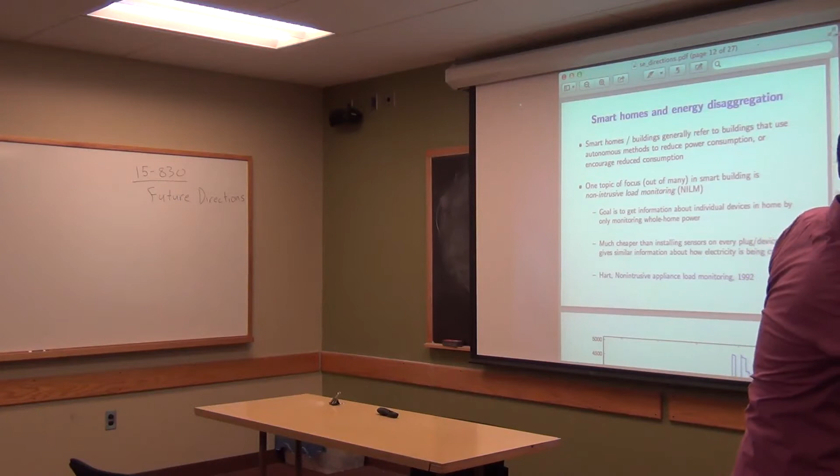Boy, this is just really deciding it wants to show some fun stuff, doesn't it? Okay, go away.

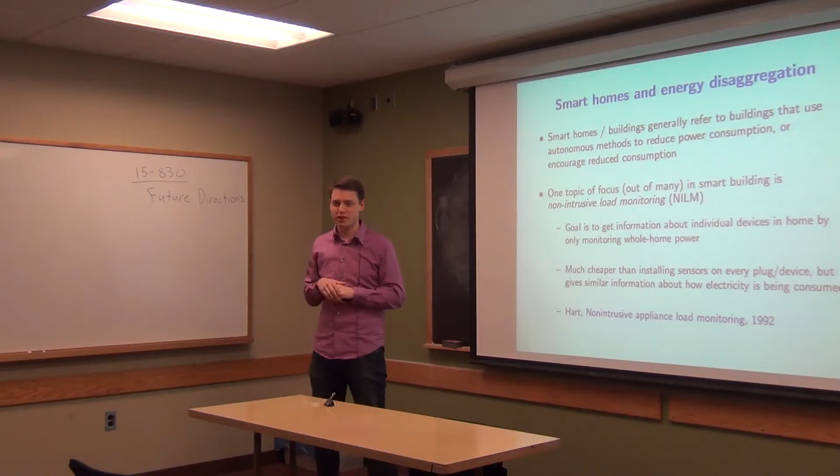Okay, so today we're going to finish up on a couple future directions, and I'm going to be very brief on all of them. Today we're talking a little bit about smart homes, and in particular I'm going to focus on an area I work on a lot, which is energy disaggregation. It's also called non-intrusive load monitoring, and I'll describe what that means in a second, and then give a very high-level overview of some of the work I've done in this area, to give you a sense of what current machine learning research is on these problems.

And I'll talk briefly about some work on demand response, and then even more briefly highlight some issues involved with things like microgrids. That will close out the things we're going to talk about today, and hopefully covers a very limited subset of the current work in sustainable energy, but at the same time shows you that there are a lot of areas where computation can play a big role here.

So to start off with, smart homes. I think the idea of a smart home has been around for a long time, right? The idea of a home that would be more intelligent, both in terms of being better for the users inside, and also for using less energy, is typically a common motivation for smart homes. So they do things like turn off lights when people are not in the rooms, predict when people are going to be home, and preheat the building, this kind of stuff.

There's a whole body of literature on these topics, but I want to focus on a particular element which broadly goes under the category of smart homes, which is non-intrusive load monitoring. And this isn't really about a smart home in the sense that we're not really taking any actions in these homes. We're really just reporting information to the user, the homeowner, or whoever's living in the home, in a more intelligent way. And here's the basic idea. Let's see, okay, I didn't just describe it from this slide too.

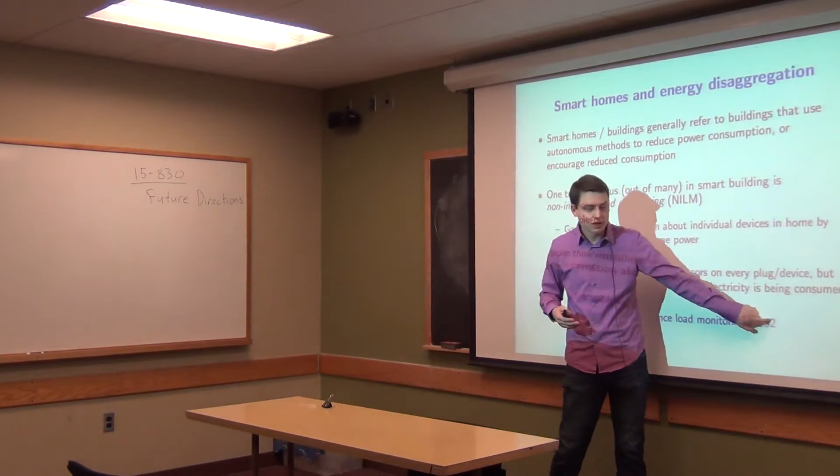Yeah? Are those device PMUs? No, this is a home, so we're not talking about PMUs. This is in a home. I'll show you an example in a second. So this is like in your home. I don't have any PMUs in my home. PMUs are used to measure phase angles on the distribution, or on the transmission network. So they're unusual to have as a personal device.

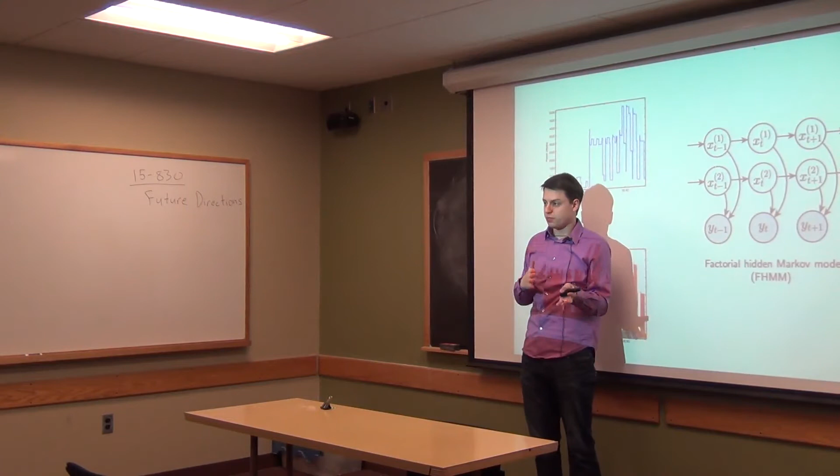Though we didn't cover it, this is a figure known as a graphical model representation. If you take more machine learning courses, you'll run into graphical models a lot. This is just a graphical way of representing the dependencies between these different elements. All this is saying is that the state at time t is probably going to be influenced by the state at time t minus 1, and it will influence the next state as well, right? Because states tend to stay on for a period of time and turn off for a period of time.

What these arrows here mean is that what we observe, which are the gray nodes here, is going to be the sum of these different unknown values. And from these things, we want to find the values of the different nodes. So again, don't worry about the details here. The overall idea is that this is a little bit richer representation than what you had in the previous thing, because it also captures dependencies between different time steps.

Now, this is the only slide I have on this, so I'm not going to cover it in any detail, but a big challenge with these kinds of models is the task I was talking about before, which is called the inference task. The inference task is, from these observations, determine the different power levels of the different devices. As I said before, this is a very hard problem, right? All you can really do, and this holds the same for these probabilistic models, is check every possible combination of appliances and go through that exponentially growing set of possible combinations. And it's not very efficient.

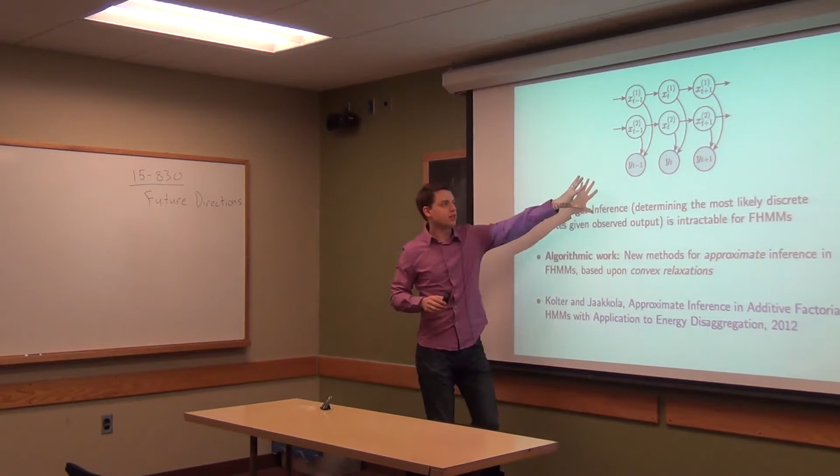And in fact, for a real home, there's far more appliances than you could really do with a model like this. That one I showed you before was pretty simple. There's only a couple, but there's actually a lot more in that house that could be on. So my work in this area was essentially using new methods for solving this inference problem. How do we compute what these values are given these outputs here? And the way we do that, as with everything else in this class, is through optimization.

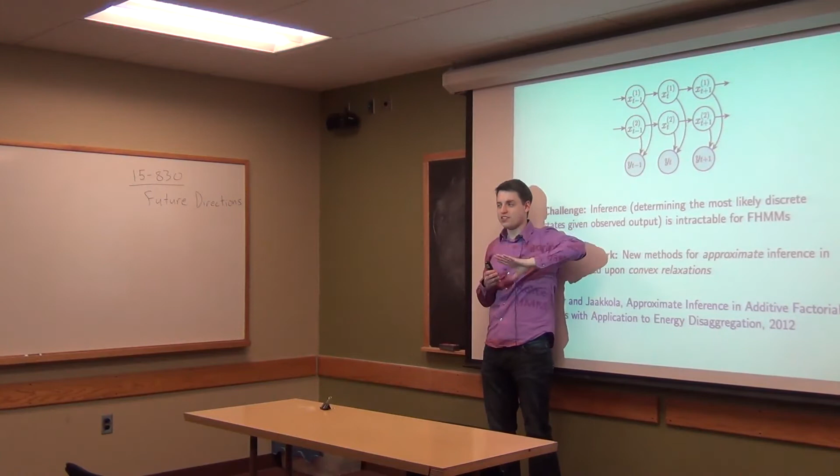It turns out that for this hard counting problem, you can actually perform what's called a relaxation. If you form it as an optimization problem, it will be non-convex, right? Because there are these constraints where things have to be in one state or the other. What you can do instead is relax these problems such that you can be in some combination of states. Now, typically that's a bad thing, because you don't want to say that some power source is half of a refrigerator and half of a dryer. That wouldn't be very likely.

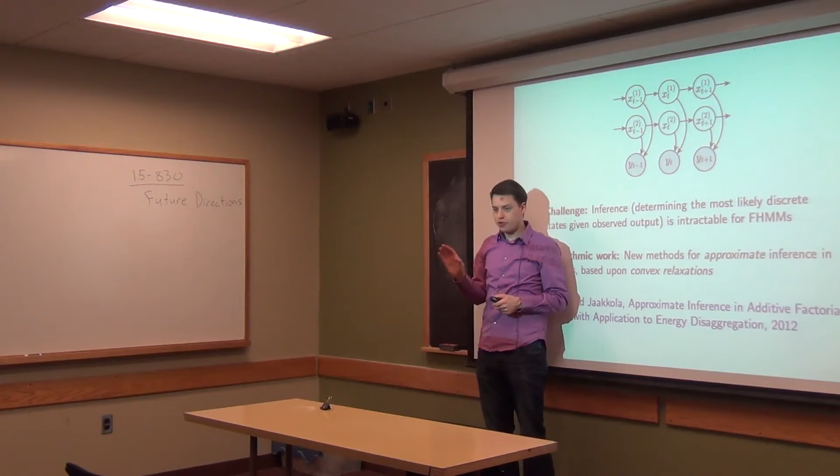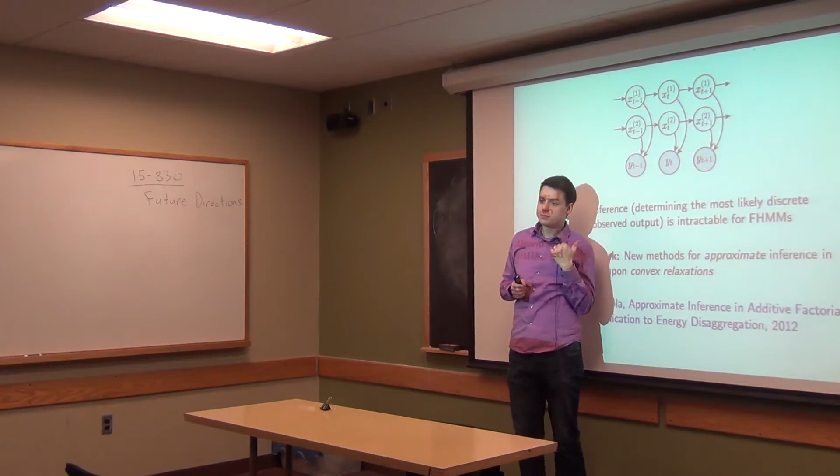But if you play some clever tricks, you can transform this to a case where you relax the problem, and then add some additional constraints that, even though they are convex, discourage situations like that. So, very hand-wavy here, but the idea is by playing some tricks in the optimization problem, you can come up with ways of solving this problem, which definitely aren't guaranteed to work, because in the general case this is actually an NP-hard problem. But they often work very well for cases that we actually see in practice.

Yeah? What do you mean by relax the problem? Yeah, so that's actually a technical term. We didn't really talk too much about integer programming in this class, or binary programming. But essentially, you could have some optimization problem where you want to minimize over x of some function of x, right? Subject to a constraint that maybe x is, say, a vector in Rn.

Subject to, and I guess this is sort of bad to write here because I'm going to constrain it much more now, but also the fact that each xi is actually going to be in 0 or 1. Okay? And this is what's known as a binary integer programming problem, because you're constraining your x's here to be binary valued. Now, this is a hard problem to solve in general. There are some sort of nice solutions, and actually Cplex has some very fast, approximate ways of solving things like this.

But in general, because these constraints here are non-convex, you can't write this in the form of any convex function. Because of that, all you can do is basically try out every single possible combination, right? In which of course there's going to be two to the n different combinations of possible values.

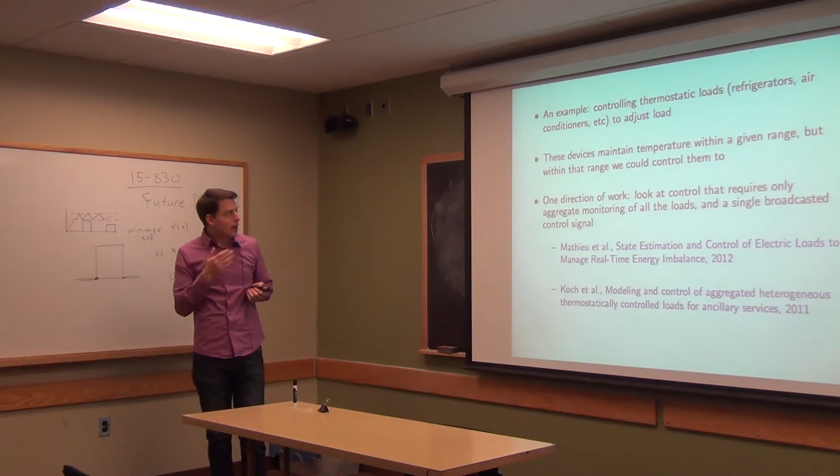In fact, they do that already. If they didn't do that, they'd have to turn on and off constantly to keep that exact temperature. So they have a little bit of a gap where they say, okay, it's okay to be within this gap here. Right? And the idea is, as long as you're maintaining things in this gap, you can really do whatever you want with these loads, right?

You could turn them on here, like this, which is kind of the standard way of doing it. I guess this is a heater, so you wait till it gets cool, you turn it on, and wait till it gets to the hottest point, then turn it off, and you just go like that. But you don't have to do that, right? You could control them differently. Turn it off maybe when it gets here, right?

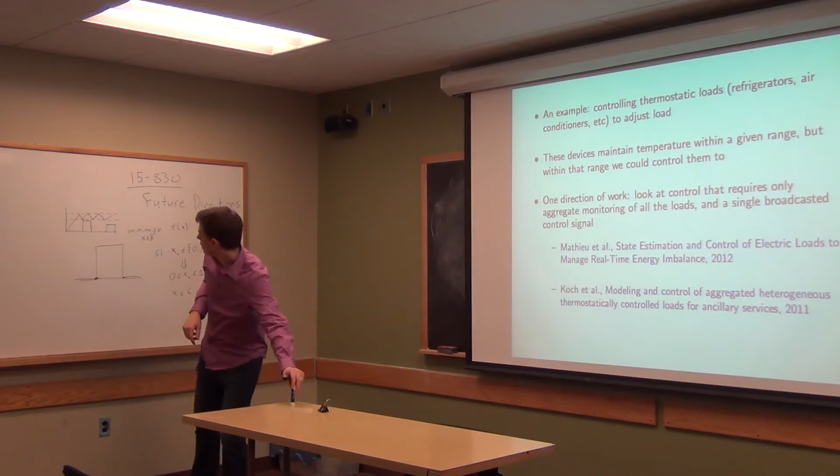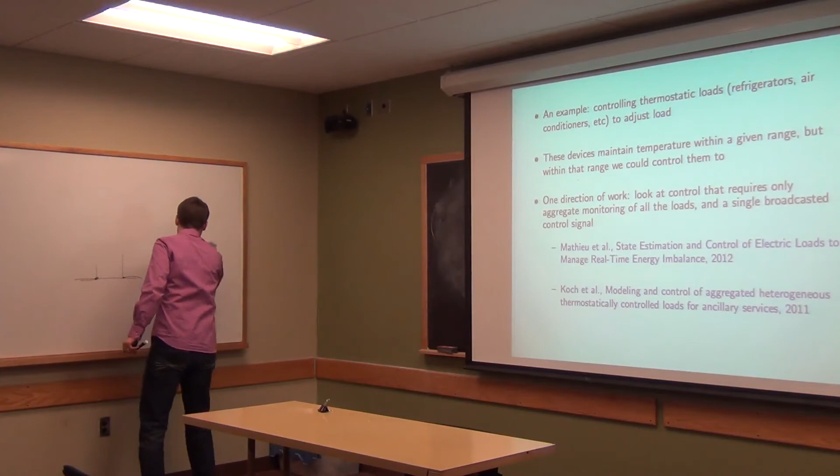Can everyone see? This is sort of a very small drawing I'm making. Maybe I'll make a little bit bigger one. All right, so you have some upper bound, and you have some lower bound on temperature.

And commonly, a heater, for example, will turn on until it's as hot as you want, or at the upper limit, and an air conditioner will do it in reverse. Then it'll turn off, and at a different rate, it'll come back down. And you'll turn it back on, and just go back and forth like this. So it's on in this range here, off here, and then on here.

But there's no requirement to turn it off and on like this, right? We could have turned it off here. That's fine. We're still within that bandwidth. And the idea is, can we intelligently control these devices? If we have one, we could do maybe a little bit. But if we have a lot of them, maybe we can coordinate these somehow to, as a total, turn on and off at the right times to track small changes in load, say, of wind power. So can we adjust these things in a way that achieves desired behavior for their total consumption?

Now, we can't actually completely eliminate their consumption, of course. All we can do is shift it in time a little bit. We can say, okay, we're going to consume here instead of here. But when wind is blowing, and you have the variability in wind, the ability to change your demand even over small time periods is very, very valuable. And so that's what these kind of papers look at, and they look at doing it in a particular way.

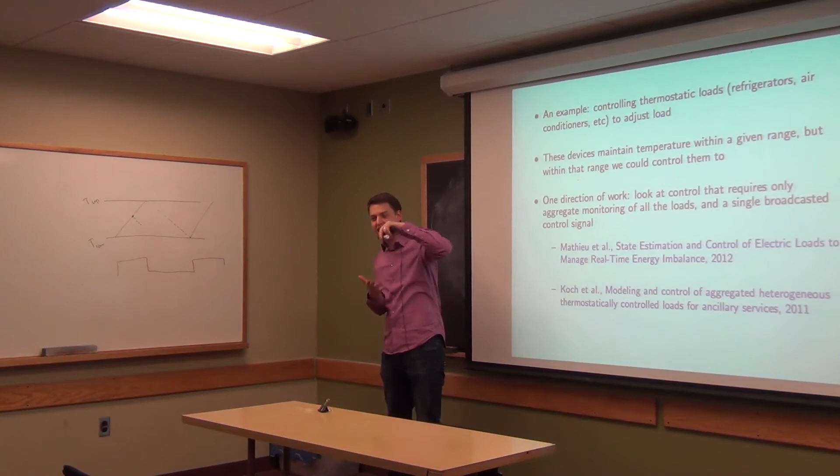They look at the situation where you only have one control action you can send to all your refrigerators. You can't control each one individually, because that could be a lot of computation, right? If you needed a state space with, say, 10,000 different states of the refrigerators, that would be hard to solve, even with something like MPC.

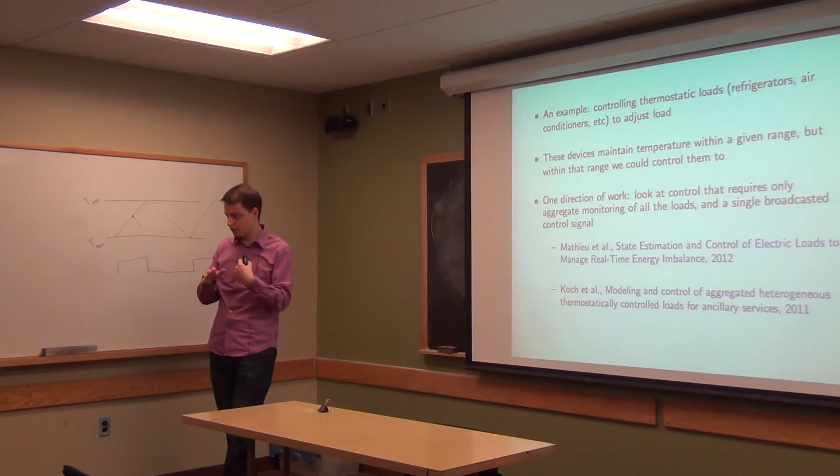So instead they say, I'm going to send out a single control signal to all the refrigerators. And that control signal will say what action you should take, basically turn on or turn off, given that you're in different ranges of temperature. They broadcast that to all the refrigerators, and they only measure the total consumption of all of them together and see how well they can track desired patterns in energy over this whole aggregate of refrigerators.

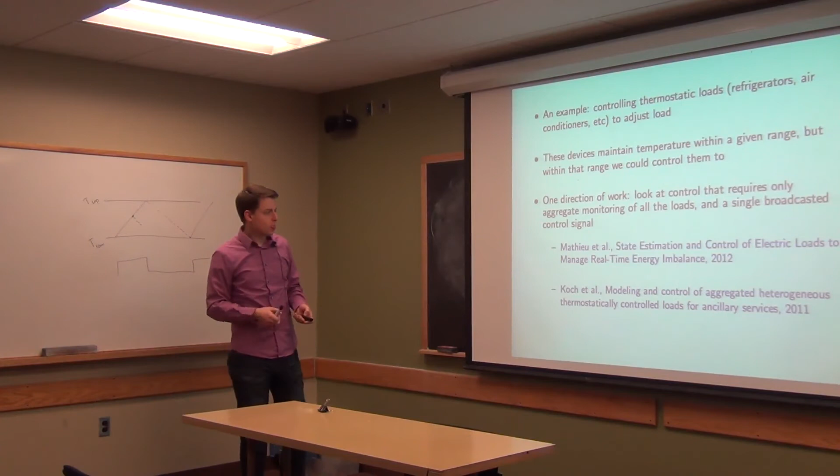So the state of their system is something that looks like this. And again, this is just a figure from the paper. Don't worry about it. It's a little bit confusing. You can look at the paper. Actually, the paper should be quite readable, given all that we've learned in the class so far.

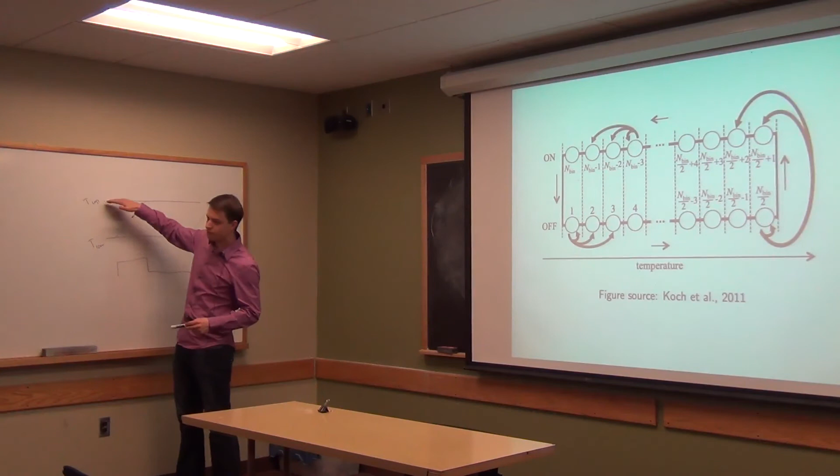They use a Kalman filter here, which we didn't really cover, but you sort of know a little bit about what that is, so this paper should hopefully be pretty readable. But the idea is you take this temperature bandwidth here, and you chop it up into n different bins. Okay, so each of these bins here represents one little range of temperature.

So the x-axis represents different temperatures for each appliance. And then this thing here represents whether they are on or off. So typically what happens is that it turns on and you increase temperature. Actually, is this right? I guess this might be showing an air conditioner, right? So it's showing the arrows this way.

So you turn it on, no, it's showing a heater. Take it back, air conditioner. If you turn it off, that will let temperature increase. Then at a certain point, temperature's gotten high enough, so you turn it on, and then it cools it back down. I guess this is a refrigerator or an air conditioner or something like that.

And typically, you just follow this sort of pattern on the outside here, right? You go through the states like this. You let it heat up for a while. You turn the air conditioner on, and then you let it cool back down. You turn it off, and it heats back up, and like that, right? But of course, you could also tell it, if we're in this state, go there instead. Turn off if you're here instead.

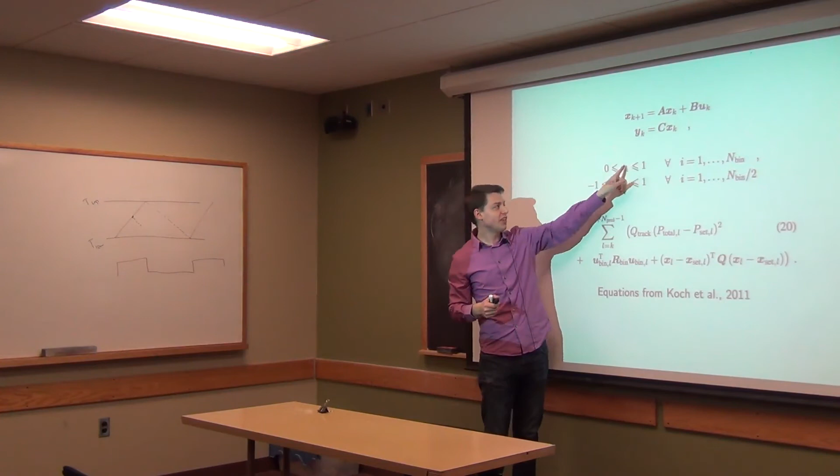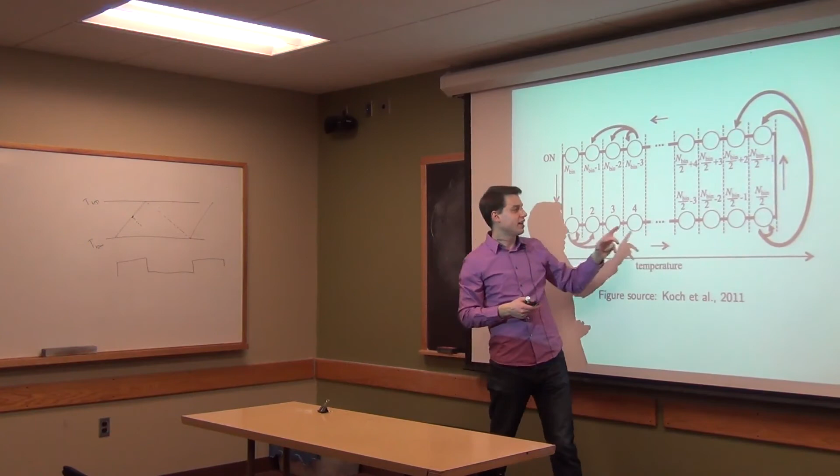Finally, you also have constraints. So what the state corresponds to is actually the fraction of devices that are in each different state of this kind here. That's the state. So the x vector is, I guess, just an n bin dimensional state vector by the notation here.

You can read the paper for details, but essentially these matrices, by putting it in a certain form and making u be essentially the number of devices you switch from one bin being off to one bin being on, which are the actions that you have, you can make this a linear dynamical system. You have linear constraints here. You have a quadratic cost function. And so you solve it with, in their case, MPC.

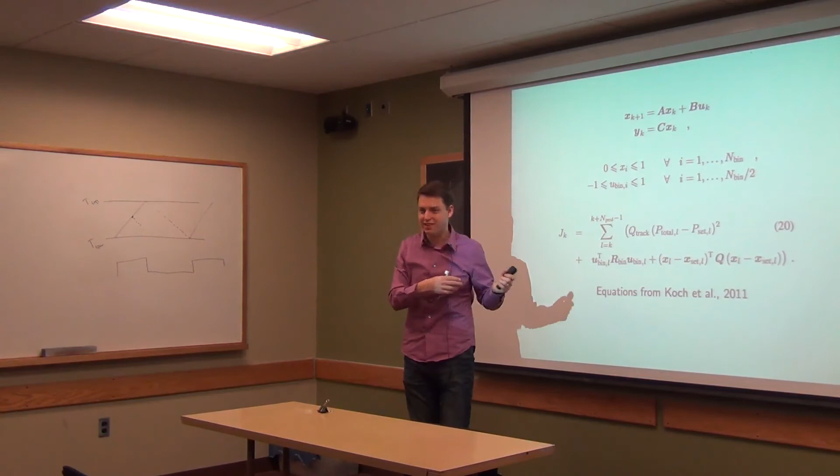Okay, so these are things that are actively being done in a lot of papers out there. This is, in fact, almost exactly what you guys did in the last homework, or maybe are still doing. And this is the kind of results they get. So this loads. I know these ones were big images. Wait for it. OK. So what happens here is that this graph here shows the temperature state.

So this is some air conditioner here. This shows the temperature state of all the different devices. They have 1,000 total, and they're showing 200 here. So what you see is together they all can be in different states, right? As you would expect, there's some randomness involved. One might be the top state, one might be the bottom state. But they're all staying within this desired region here.

And by controlling them intelligently, you can actually follow, and you can't even really see this, but essentially the thing they're trying to track in aggregate power is a pretty big change in total consumption here. It's going from 3 megawatts to maybe 12 megawatts of power over all of them. And you're tracking kind of very detailed curves in power.

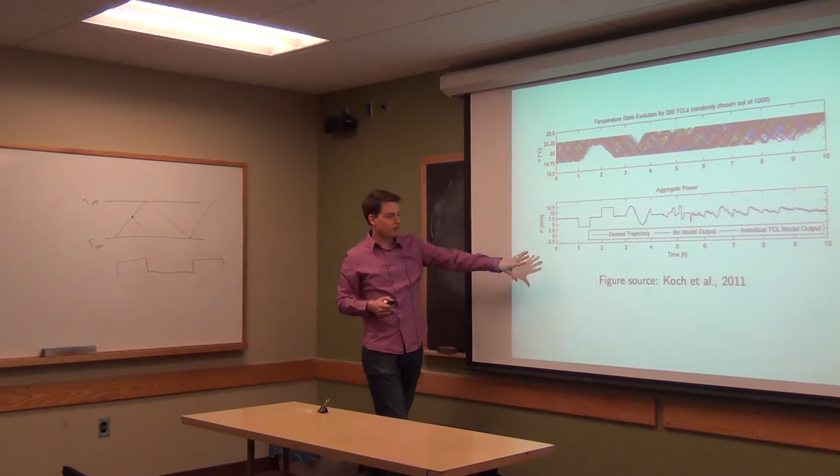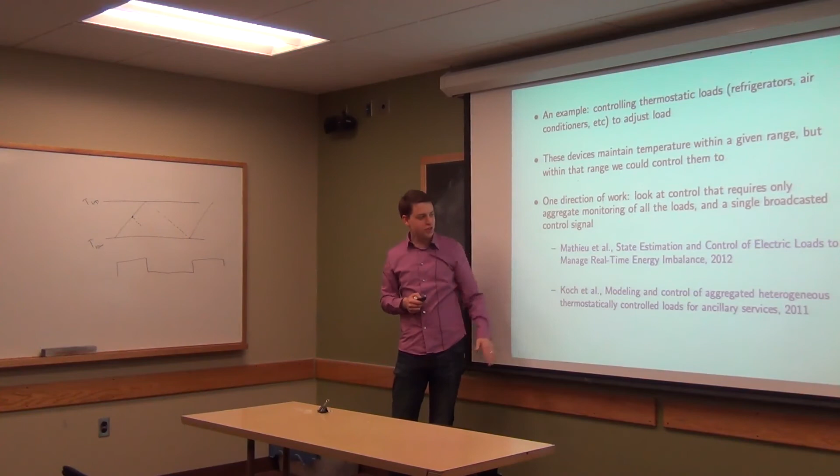And again, if you want more details, this is from the Koch et al. paper, but it's the same group doing both these papers here. I don't know which one's the pronunciation there, but these are both links here, so you can check them out if you want to see more.

Okay, so finally the last thing I want to talk about, I only have, I think, 2 slides on this, is microgrids. We've been talking in a lot of this class about either the home level, with device identification or disaggregating different consumption in a home, or about grid level stuff, where we're talking about the entire power grid of big generators and big consumers. And microgrids kind of lie in the middle between these two things.

The idea is that we're going to have something like a real grid. So we're going to have some generation, maybe some storage. We're going to have loads there.

But we're going to do it at a much smaller scale. And the advantages here are, there can be a lot. You can have much more efficient consumption because you're not maybe transmitting your power over long distances. You have a solar panel right there by your home. You can use that energy very efficiently after it's been generated, I should add.

It also can be more reliable, right? Because even if there is a big outage to the actual grid, presumably if the grid does not go out, you're still typically hooked up to the grid in a microgrid. So you can always use the grid if you want to. But in the case of some outage, you still have all kind of the local supply that you need, right? You have generation locally, you have storage locally, you have all these things that can actually sort of help you. So they can actually be more reliable.

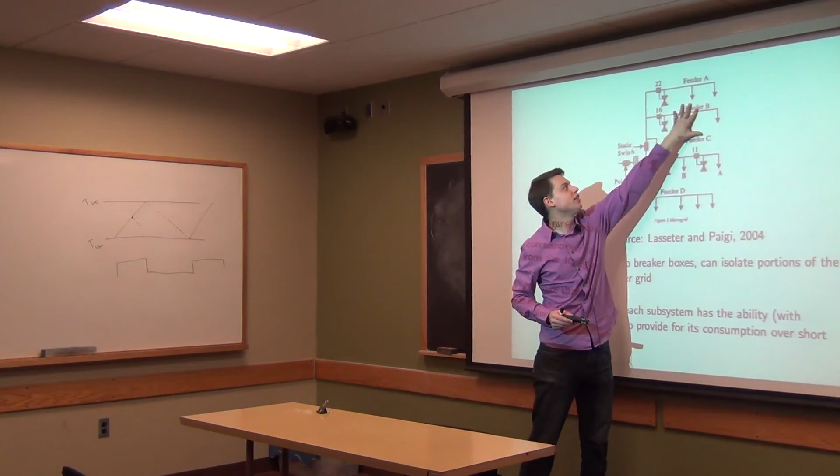And again, I'm not covering this in any detail here. I'm just sort of getting the broad idea here is that you create all the elements of a typical grid, you just do it at a much smaller scale. And you do it in a way such that these ideally can be self-sufficient if they want to be, or maybe self-sufficient for a certain period of time, while you can also just, in the worst case, draw from the grid as you would normally.

And again, what people mean by microgrid sometimes changes. So you might hear that term apply to a lot of things, but this is sort of the typical context of it. And I think a lot of the ideas that we covered in this class, right, of planning and storage and control, all these kind of things, they will come up the exact same way in microgrids.

And they'll do it at a much smaller scale, so you actually need more computation locally in order to coordinate the resources behind this area if you do lose connection to the actual grid, or if you do disconnect intentionally from the actual grid. You need that kind of local control, that local planning. You need to understand the power. I guess power flow, depending on the size of it, might be an issue or it might not be, but it could be an issue even for small systems. So you need to understand all those things in order to run this microgrid. And you have to do all these things we've been talking about at that small scale. Would it be easier because it's at a small scale?

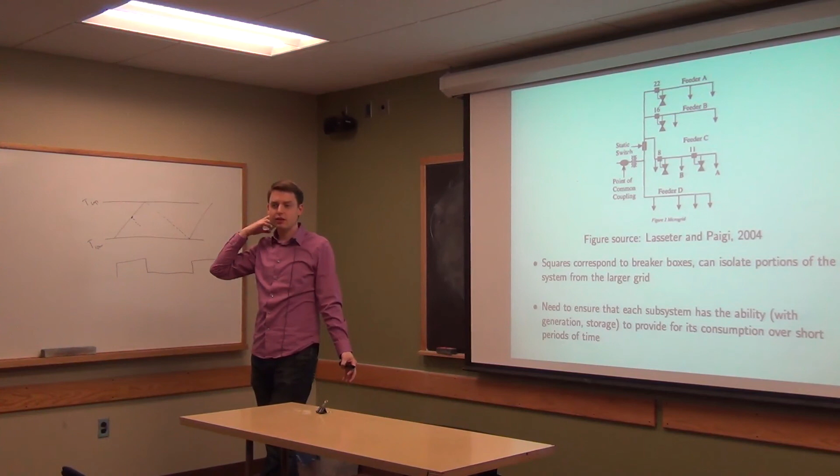It certainly, yeah, probably would be easier. I mean, the ideas are it can probably be a little bit less intensive than the massive optimal power flow you run for the grid. It can probably do things like demand response also, because it's sort of the ultimate demand response, right? You could just isolate it entirely from the grid and give that service to the grid.

You can do things like store power locally and then just use it when you need it. You could store power from the grid while everything's going well, and then only go off if the grid goes down or something like that. So all these things need to be dealt with, but because they're smaller, they can be dealt with better. But at the same time, if everyone was doing this, you'd have a lot of different control going on, and in total, that would actually be quite a bit more, right?

Because these are much more flexible. There's more things you can do here. So there are pluses and minuses from the complexity side, but I think overall the potential gains in efficiency and reliability are very appealing here.

Okay, so that actually brings us to the end of the course. So just some final thoughts here, and I'm also going to end early today. But big picture, right? Let's just sum up everything we learned in this course.

I think probably a lot of you are here because you saw the course title, and you personally already were interested in sustainable energy. So at least that bit will probably be easy to convince you of, that sustainable energy really is one of the grand challenges that the world is currently facing. And I also think that it's equally clear that there's no easy solution to this. Maybe if we invent cold fusion, that's about as easy as you can get, but it's sort of funny to call that easy, right? And even then, it wouldn't be that easy, because there'd be all sorts of regulations about how you, anyway.

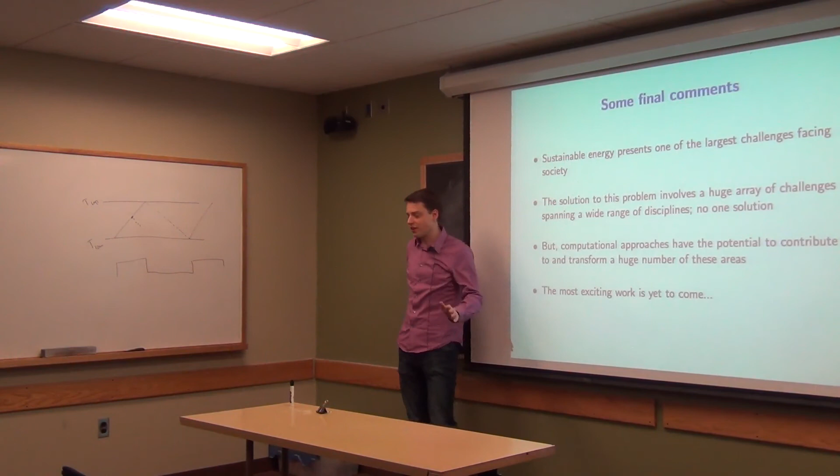This is the area that I work in. This is what I'm dedicating my research to. So I think it's an area of huge potential, an area where we really can change the world and address this large problem facing society. And I hope that you will go on and continue to do such things in the future.